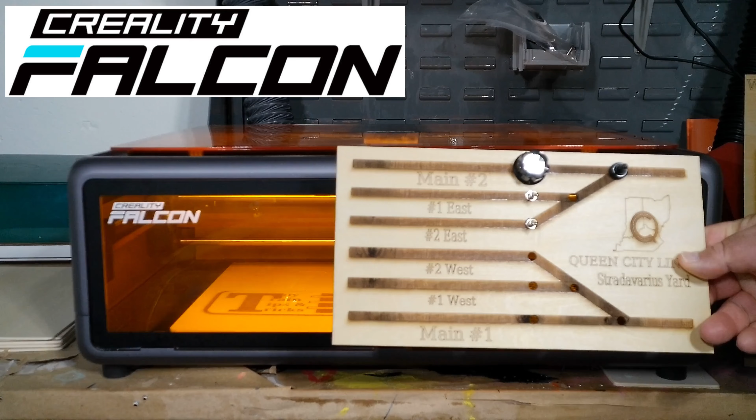And over to the creation station to feature this, the Creality Falcon A1 laser engraver. In this episode we're going to be using this to make some cool projects for the layout, like some control panels. But before we get to the projects themselves, let's take a look under the hood of the Falcon A1 and see what it's all about.

Creality describes the Falcon A1 as the first laser engraver in your life. This is a great choice for beginners who still want a full functioning machine. It is packed with features that make it intuitive and easy to use, but it's also large enough and powerful enough to do many projects both around the house and around the layout.

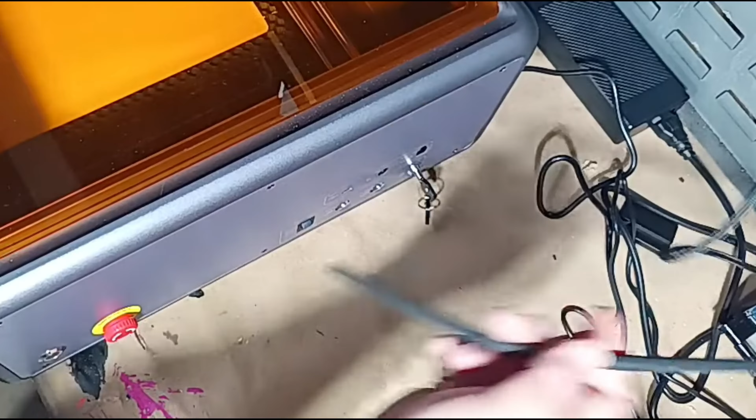Unboxing and setup is easy. Just plug in the air assist pump and the power adapter cord, attach the included exhaust pipe, and you're ready to go. By the way, ventilation is very important.

The provided tubing and a good window will work for many materials, but you really should consider adding an air purification system or fume removal for heavy use. These can be found on the official Creality store site.

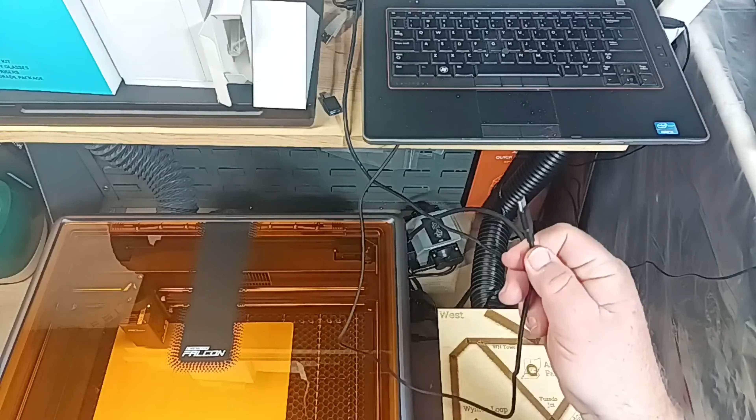You will need a nearby computer to control the Falcon A1, but it does not have to be state-of-the-art. I'm using an older Windows 10 laptop. Connect a USB port from the computer to the USB Type-C port of the Falcon A1 with the included cable. The Falcon Design Space software is easy to use, and best of all, it's free.

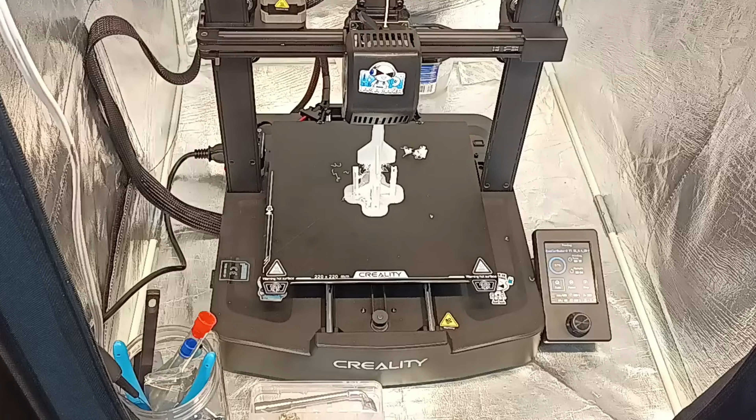In addition to the control software, Creality also has a large community of helpful users who can supply creative ideas, helpful tips, and even free files for you to use with your machine. And yes, that's the same Creality that's known for its quality line of 3D printers, like my Ender 3 V3 SE and other great machines for creators.

The Falcon A1 also offers a large print area, roughly 12 by 15 inches, so it's big enough to handle a wide range of modeling projects, and its 10-watt laser can cut a multitude of materials.

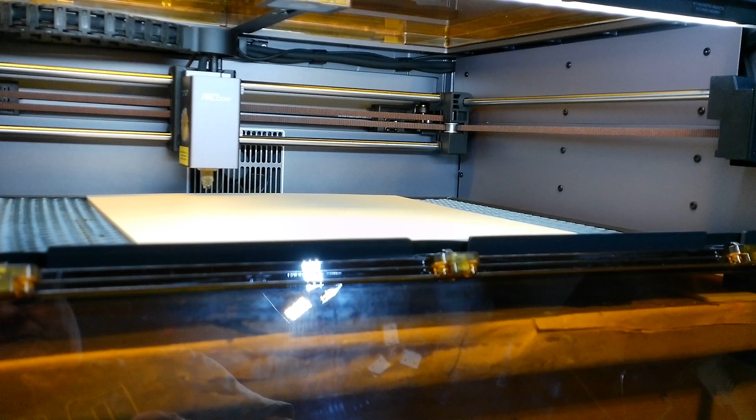Adjusting the engraver settings for different materials can sometimes be a chore, but Creality makes that easy too. Materials purchased through the Creality store include a QR code that can be scanned by the Falcon A1's built-in camera, and the optimal settings are automatically loaded into the Falcon Design Space software.

So as a test file to see what this thing could do, I went to Craftseek, which has a large collection of free files, and I selected a ruler and square. And here's the end results. We've got crisp graphics and nice clean cut lines. And who can't use another ruler, straight edge, and square?

And so that inspired me to make my own project, a new control panel for the new staging yard on my train layout. So this is how I used to do my control panels. I would start by putting a coat of white paint on, let it dry overnight. Then I would add the tape of the track designs. Then I would come over that with a coat of black paint. Let that dry, sometimes a second coat of black paint, let that dry.

Then I would come back and sometimes add lettering. I never did on this one. And then drill all the holes for all of my electrical components. And so to do a panel, it took usually 3, 4, sometimes 5 days to do a panel like this.

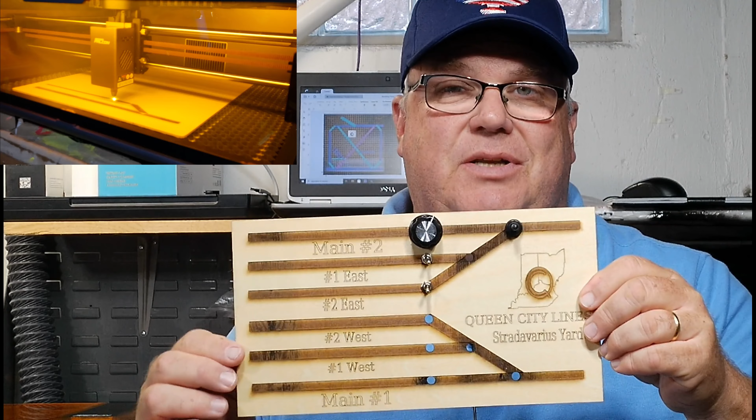Or my new panel for my yard, it took me about 20 to 25 minutes in the software to design it, and then another 30 minutes or so to actually print it. And here it is, with all of my holes pre-drilled for my electrical components.

So here we have, for my turnouts, this is a single pole, double throw, momentary contact switch - basically a miniature version of your Lionel turnout controller. These are single pole, single throw, basically on-off switches, so I can turn power to the sidings on and off.

And then this is a single pole, 6 throw rotary, so I could choose from up to 6 different throttles. I'm going to use 3 with off in between them.

So instead of 3 or 4 days plus drilling the holes and adding the wiring, versus about an hour, and everything is pre-drilled, ready to go. And I think this looks a whole lot better than that.

You also have the option, if you don't like the wood look, you can always stain it. You can put a clear coat on it. You can also use colored plywood or colored acrylic to get different color variations if you want a more industrialized looking panel. And so this was so much fun.

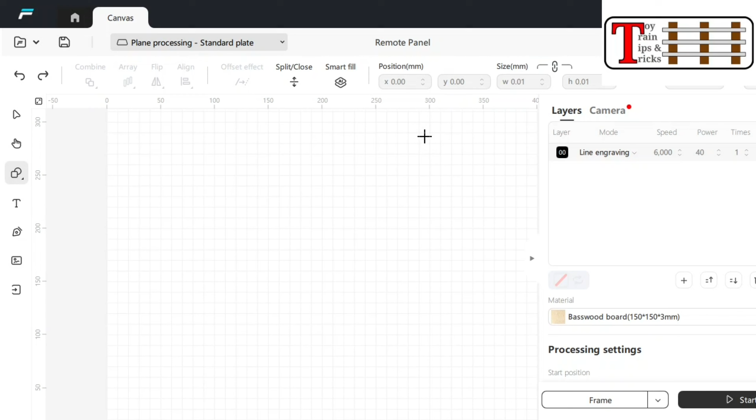Let's do another one, and we'll take it step by step from design to finished product. This one's a little more complicated. We've got two main lines, we've got crossovers, and we've got some sidings that the operator is going to have to worry about. But our area is 300 by 300.

Here to there, and over to right about there. If we're going to start another one, we're going to be doing some fill engraving.

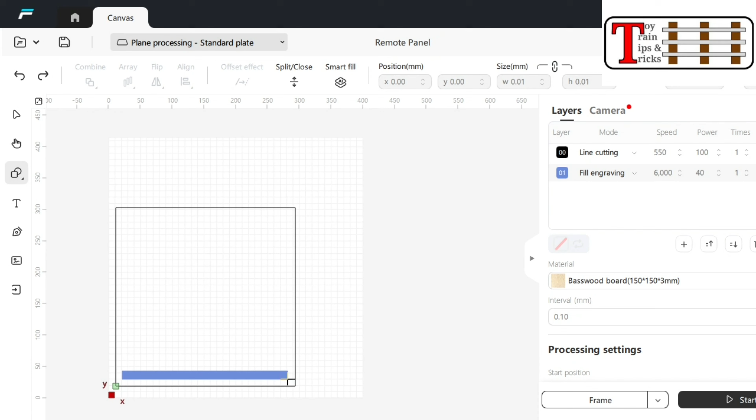And with this, we're going to take our shape tool and we are going to draw in - this is going to be main line number 1. And it's a main line, so it's going to be thicker, going pretty much from edge to edge. So we're going to copy this because this is going to define our main line width.

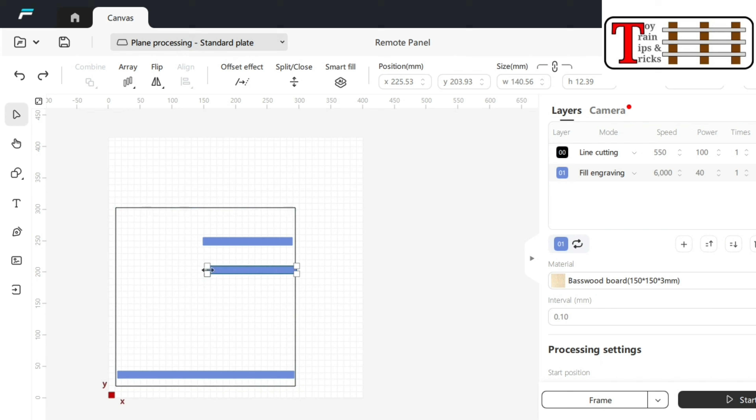But this one, because of the way the track plan works, we're going to start, and this is going to be shorter - the main line angles away. So we're going to copy it, I'm going to paste it. Now this one, we're going to rotate at an angle, and let's bring it up here. So that's our main line.

Now this little triangle here, we're going to worry about that later. Now we've got some secondary mains - they're going to be a little bit thinner. This is going to be another fill engraving.

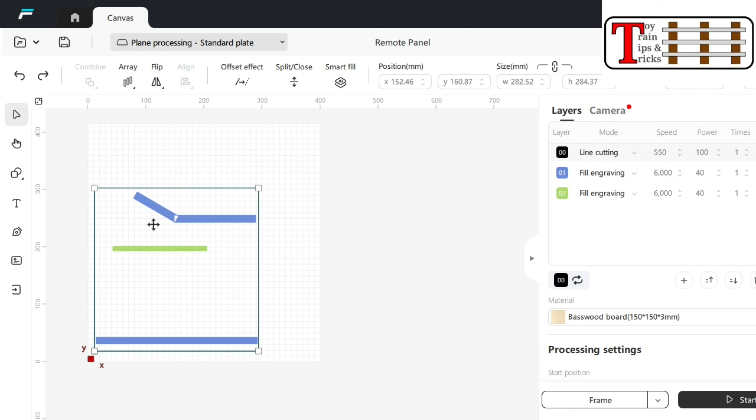In our shape tool, we're going to make our rectangle again, but we're going to make it a little narrower this time. So now that I've got a decent width, I'm going to copy it and I'm going to paste it up here. All right, so we have our main lines in blue.

We have our secondary lines in green. Now let's add our spurs and let's zoom out and see what we've got. Okay, main line, secondary tracks, and sidings. Let's take care of this problem of these little white triangles.

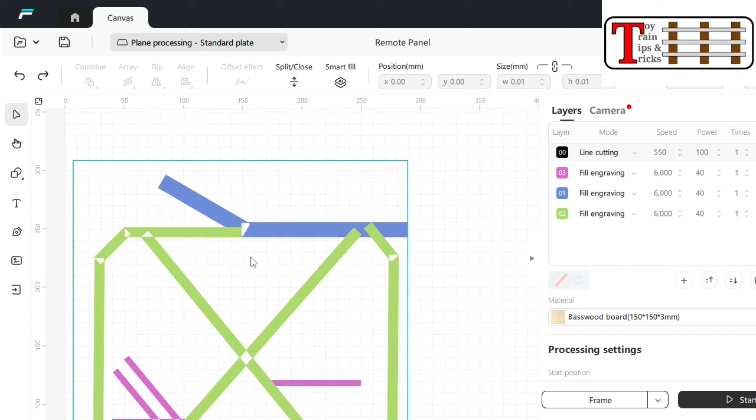What we're going to have to do is add another layer, fill engraving, and then we are going to alternate colors here. So we're going to take this one and let's make this one layer 4. And you see that white triangle is gone now.

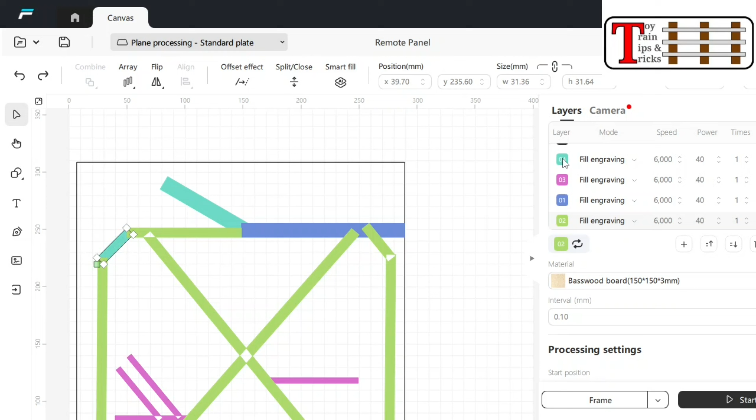And let's do this one. I got rid of that one. This one - okay, so now all of those white triangles are gone. That means all of this is going to be engraved as fill.

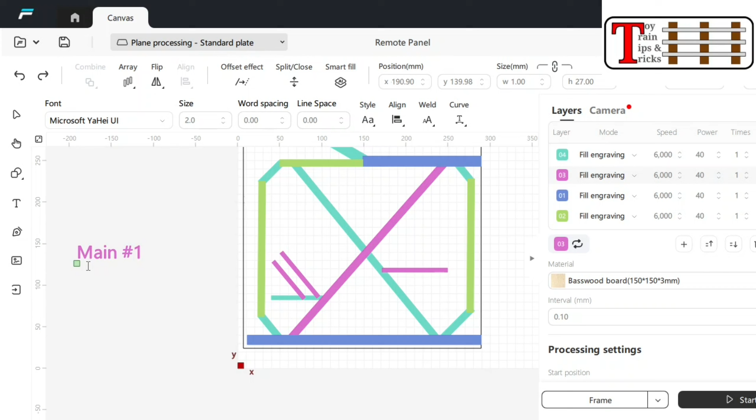I'm going to start adding text. Now let's pick our text tool. We're going to click over here. We're going to call it main number 1. And let's change our font first of all - so we're going to go to DejaVu Serif.

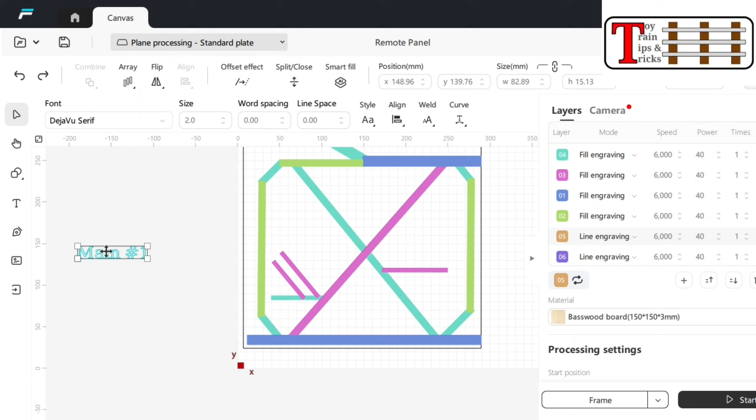Changing this is going to be line engraving - see now how that changes the color. And we're going to move main number 1 down here on the bottom. Now that is way too big, so let's...

Shrink it down. One thing I forgot is there is a drawbridge here, so yeah, let's go back to our shapes. And again, let's make it a rectangle, and then let's add a rectangle here.

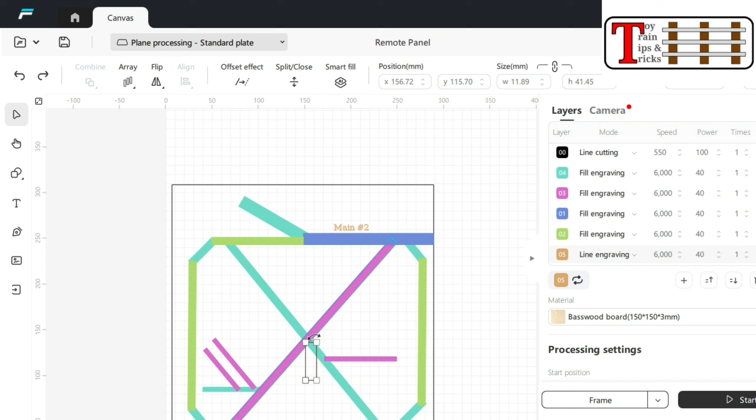And then let's rotate it. Rotate. It's too wide. Yeah, just like that. And then let's move this way.

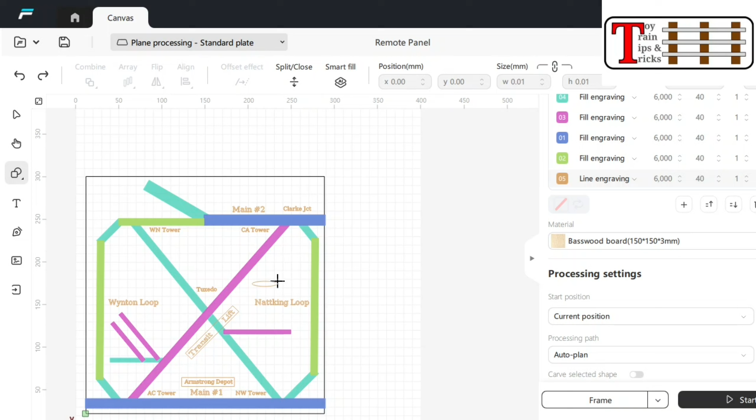All right, so I've got my lines, I've got my text. The next thing I want to do is pre-cut holes for my electrical control. So I'm going to come over here to my shapes and do a circle. Let's start with one right here, and let's make sure that it is a line cut.

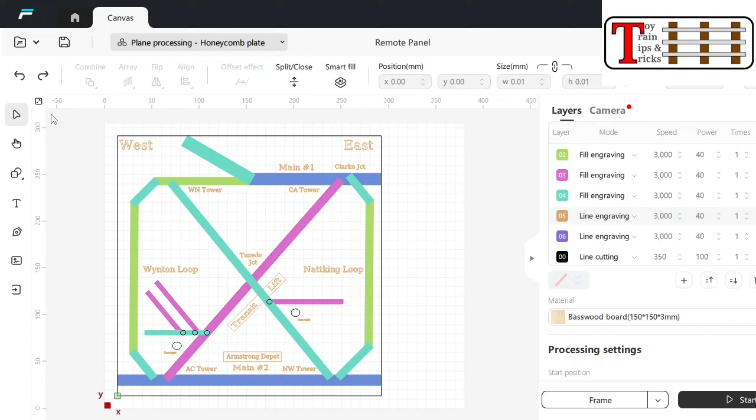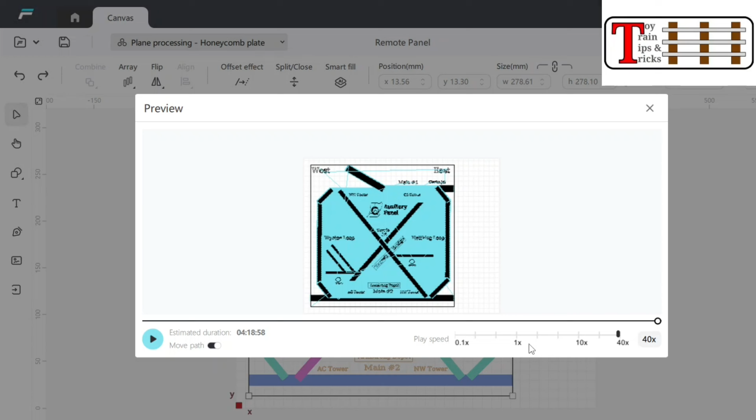Now, one thing I can do is come up here and preview what the laser is going to do. I can turn it all the way up. I can watch it either in real speed or really, really sped up, which is what I'm doing now, so you can see exactly what the laser is going to do.

The blue line here shows where the laser is moving from one spot to another. Now, I am doing this on a desktop computer that is not connected to my Falcon, but if it were connected, you see here it says not connected. If it were connected, we could just go ahead and frame it, make the laser, double check the aiming of the laser with the product, and hit start, and it would go.

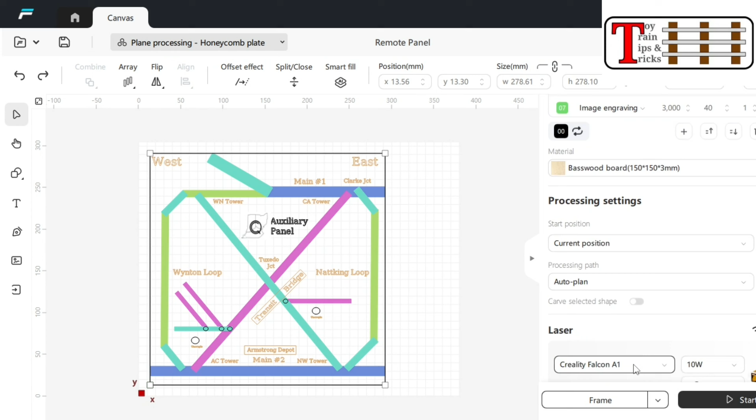Since I am not connected, I'm going to have to transfer this design to the Falcon a little bit differently. So we're going to save it as a document, and I'm going to save that onto a flash drive and take it over to the laptop that is connected to my Falcon, and we are going to go ahead and burn this.

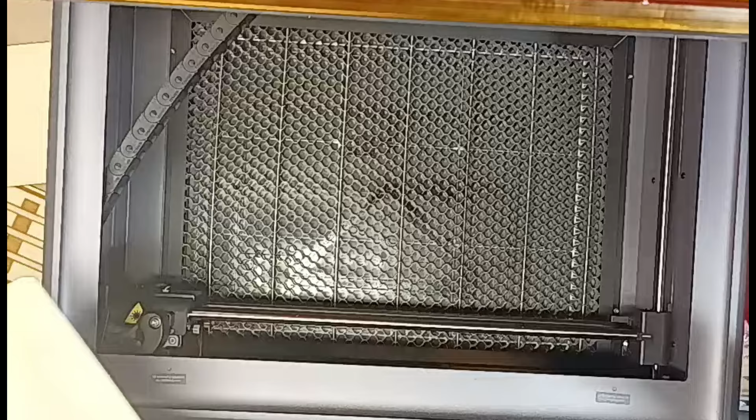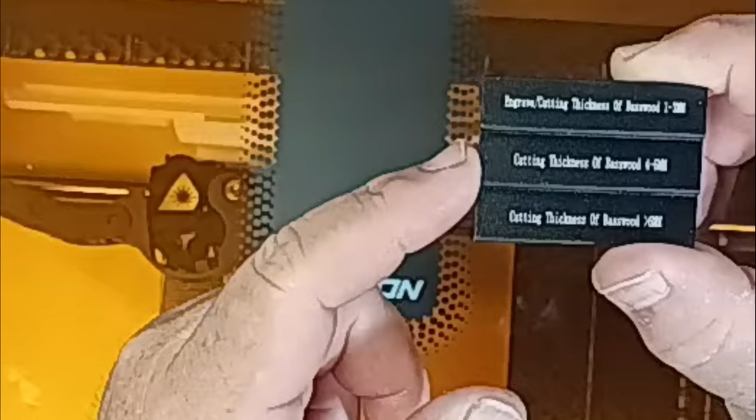I loaded my design into the laptop using a flash drive. I put my material onto the engraving plate, or in this case, the optional honeycomb to reduce heat while cutting. Then I focused the laser using the focus guide. Loosen the two thumb screws on the laser module and manually adjust the height to the appropriate step on the focus guide. In this case, that's the highest step.

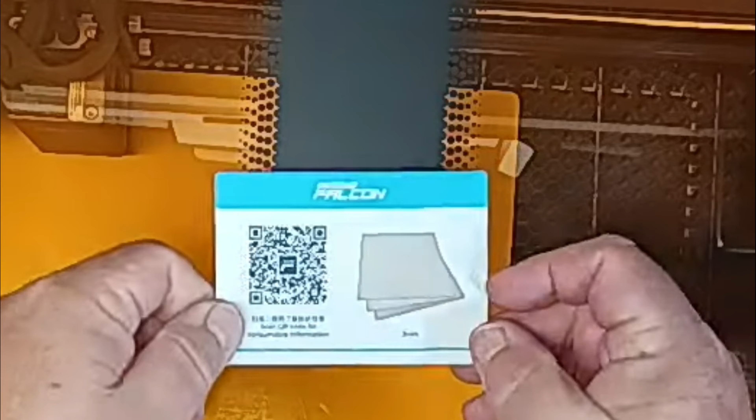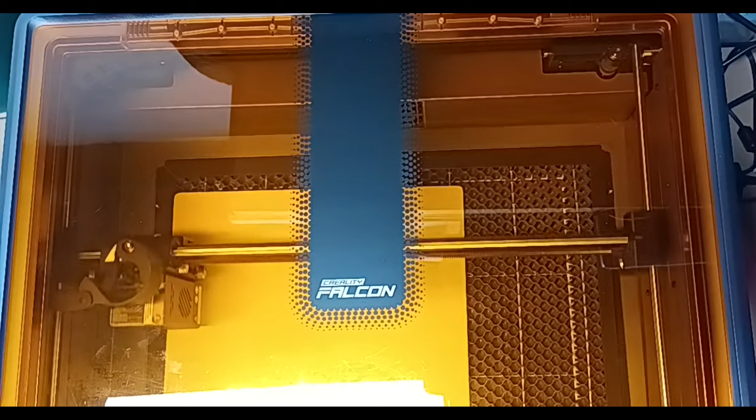Then I double-checked the materials setting in the Falcon Design software. In this case, I simply placed the material QR code under the Falcon A1's camera, and the software automatically selected the proper material settings. Then I used the frame function to check the position of the laser with my material and design. I used the Falcon A1's camera to see the material with my design superimposed onto it to check the position. When everything was set, I hit print, watched, and waited.

And so this one is a lot more complicated than the first. This one took about an hour and a half to cut. So this will work well.

Now, to mount this on my fascia board, I'm going to put a piano hinge across the bottom so that when I need to access the wiring, it will fold down and I'll be able to access all of the wiring here. And then to hold it in its regular position, the hinge goes up, and I just fasten a couple of pieces of hook and loop tape to the top to keep it up in its normal position. Simple, easy, and plenty of access all at the same time.

You don't have to necessarily have the wood look. You can go with colored plywood to give you that look. You can use acrylic. You could even do it in metal if you really, really wanted to.

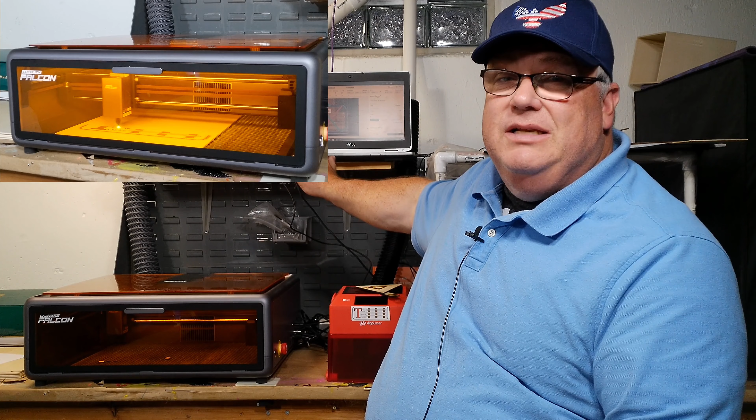So you see that the Falcon A1 is easy enough for beginners. Again, I am just getting started in laser engraving. Setup could not be easier. The included software is very easy to use. It has automatic materials recognition. It's pretty much foolproof. So for me, this is kind of a no-brainer as far as something to have for use not only around the layout, but around the house as well.